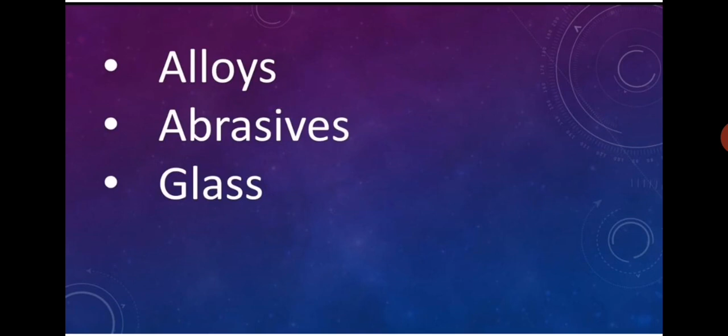This industrial chemistry 1 includes 3 topics: alloys, abrasives and glass. As you know, I already started this unit in the Zoom classes in the previous week. So today we are going to discuss alloys. So friends, in alloys we have to study their introduction, why alloys are used, the importance and uses of alloys, types of alloys, their properties and different applications of these alloys.

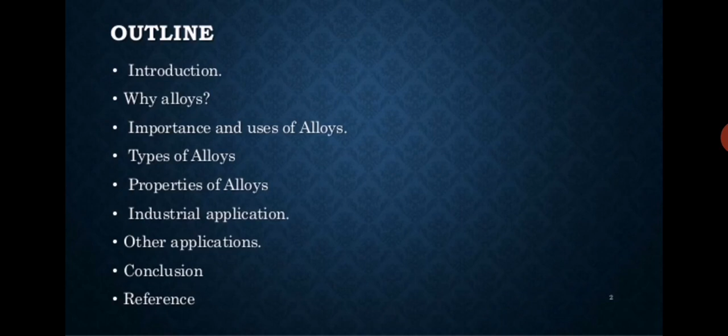Now we are going to the preparation of alloys. Why are we going to prepare these alloys? Alloys can be made by combining 2 or more metal elements while in a molten state or by bonding metal powders. This is the first bit. These alloys are made through physical processes, and these alloys will be determined by physical and chemical properties.

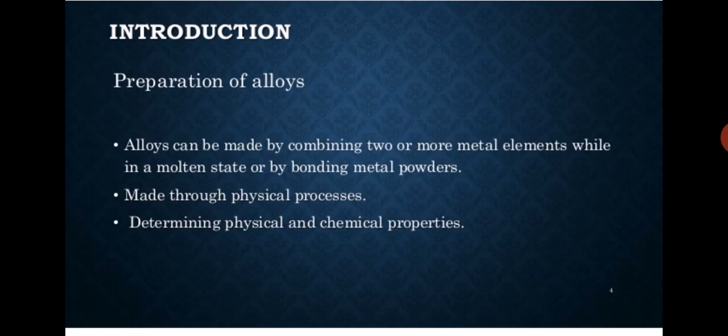Now, what is an alloy? Alloys are mixtures of a metal with another metal or non-metal in the same group that are prepared by mixing the metals in their molten state through physical processes. That means, as I told you in our Zoom class, an alloy is nothing but a homogeneous mixture composed of 2 or more elements.

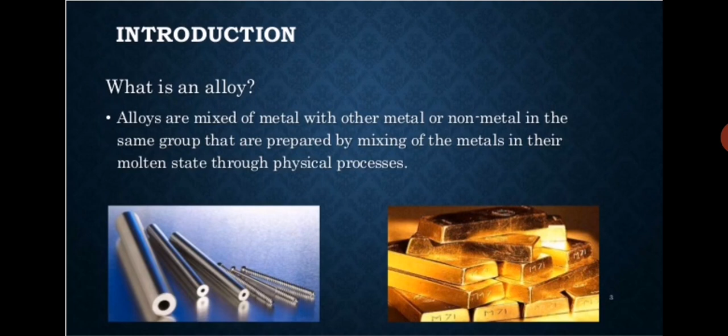Now, significance of alloys. To increase the hardness and strength of metal, to prevent corrosion or rusting of the metals, and to improve the appearance of the metal surface, meaning to modify the color of the metals. The first one, to increase the hardness and strength of a metal. For example, elements like manganese, chromium, vanadium, nickel, etc. have greater strength and hardness, and they are very tough metals.

By applying paint or color to the alloys, they become corrosionless, or by adding other metals. For example, in stainless steel, along with carbon and iron, we add a little amount of chromium. Here we add chromium only for the stainless, meaning corrosionless, property.

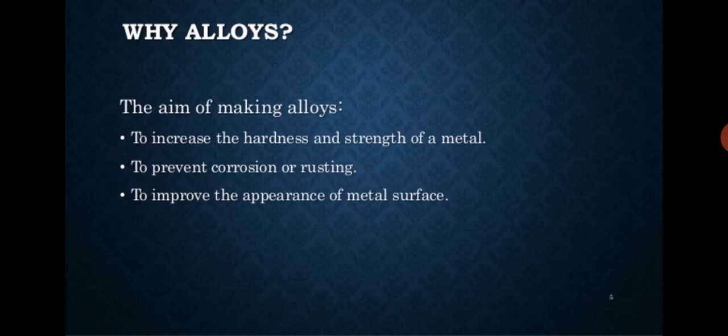Okay, now we are moving to the types of alloys. Alloys are mainly two types, ferrous and non-ferrous alloys. Ferrous alloys are those which contain iron as a major metal, while non-ferrous alloys don't have any iron content. You see, we classify alloys into two types, ferrous and non-ferrous. Ferrous means iron based, where the major component is iron, and non-ferrous means there will be no iron content.

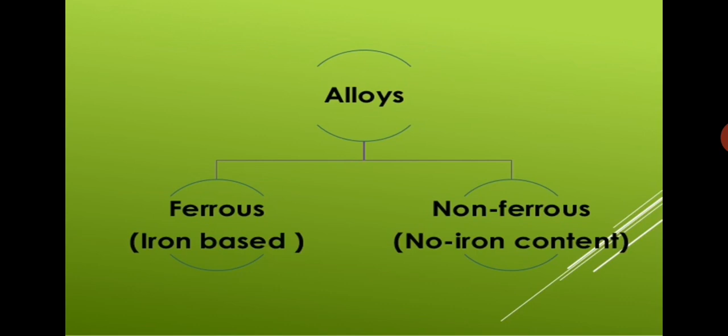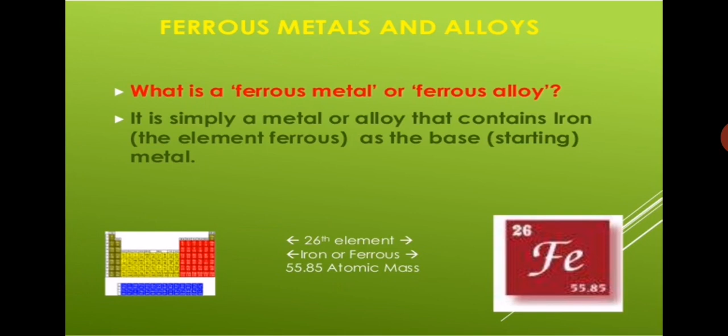Here are some examples of ferrous metals. Ferrous alloys are simply a metal or alloy that contains iron as the base or starting material. Ferrous alloys can be broadly classified into mainly two types, steels and cast iron. Steel has carbon less than 2.1%, and in cast iron the percentage of carbon is greater, from 2.1 to 6.67.

Steels have carbon in the combined form, for example, austenite, cementite. Cast irons have carbon in the free form as graphite. These ferrous alloys are not only iron and carbon alloys; a few other alloying elements are also added for special properties.

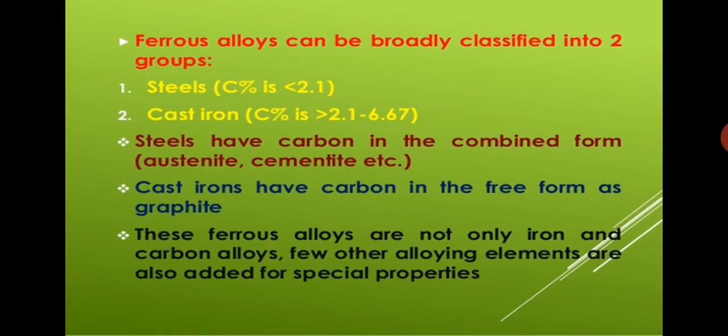So in the alloys, the first one is carbon steels. Carbon steel is further divided into low carbon steel, also called mild steel, medium carbon steel and high carbon steel. In mild steel, the carbon content is 0.05% to 0.3%. This is also known as mild steel. It is a low cost material that is easy to shape, while not as hard as higher carbon steels. Its surface hardness can be increased by carburizing.

What are the uses of these carbon steels? We use carbon steel materials in bullets, nuts and bolts, chains, hinges, knives and armor, etc. The second one, medium carbon steel. The carbon content in medium carbon steel is 0.3 to 0.7%. Medium carbon steel is ductile, strong, with good wear properties.

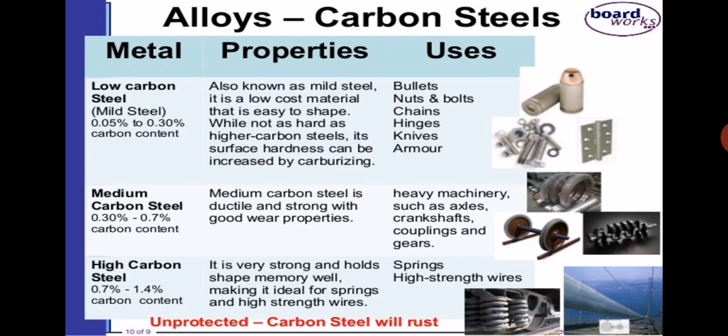The next one, stainless steel. Stainless steel is made up of iron, nickel and chromium. Here we use chromium for its corrosion resistant property. Uses: kitchen worktops, cutlery, pans, chains, wire, Swiss army knives, etc.

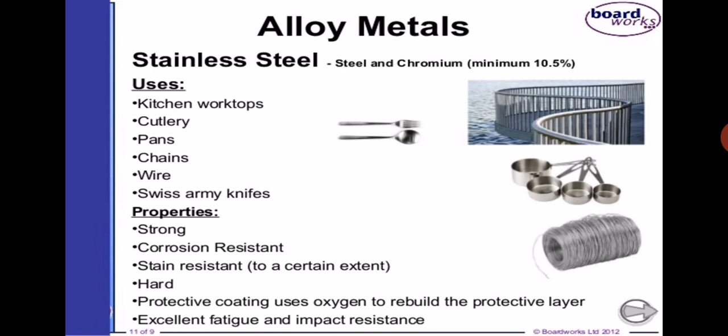The properties of stainless steel: strong, corrosion resistant, stain resistant, hard, a protective coating using oxygen to rebuild the protective layer, excellent fatigue and impact resistance. Moving on in the ferrous alloys, the next one is high speed steel. High speed steel contains 18% tungsten, 4% chromium, 1% vanadium, and carbon only 0.5 to 0.8%.

The uses: high speed steel is a subset of tool steels. They are commonly used in tool bits and cutting tools. It is often used in power saw blades and drill bits, for example milling tools, drill bits, turning tools and circular saw blades. These are mostly used in electrical and wood cutters, etc.

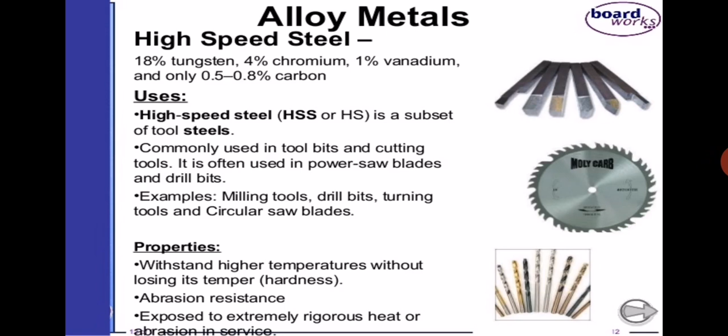Properties: withstands higher temperatures without losing its hardness, and abrasion resistance when exposed to extremely rigorous heat or abrasion in service. The next one, low carbon steel. Low carbon steel contains less than about 0.25% carbon. It is unresponsive to heat treatment because of the very small amount of martensite. It can be strengthened by cold work.

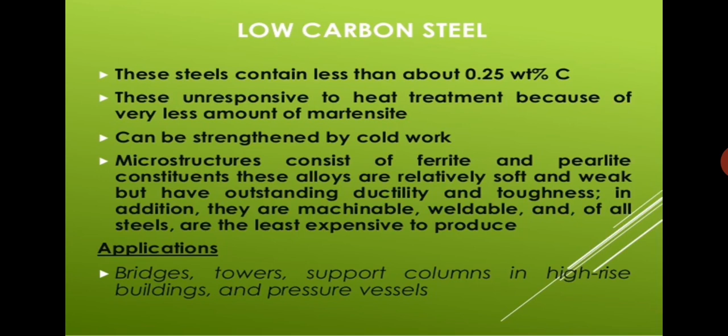Low carbon steel microstructures consist of ferrite and pearlite constituents. These alloys are relatively soft and weak. In addition, they are machinable, weldable and of all steels the least expensive to produce. Applications of low carbon steel: bridges, towers, support columns in high-rise buildings and pressure vessels. In all these construction materials we use low carbon steel.

High carbon steel. High carbon steels contain 0.6 to 2.1% carbon. These are mainly tool steels. They have very good hardness and wear resistance. Tool and die steels are high carbon alloys usually containing chromium, vanadium, tungsten and molybdenum. These alloying metals combine with carbon to form very hard and wear resistant carbide compounds.

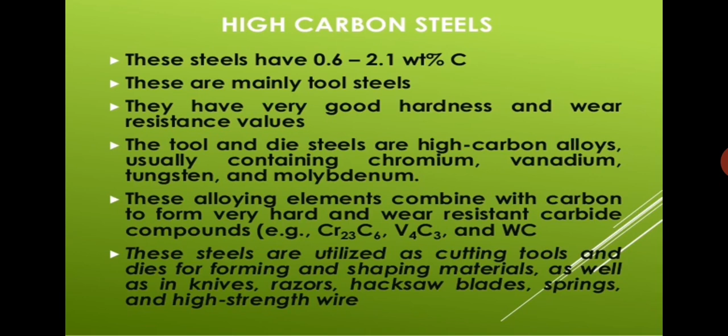These steels are utilized as cutting tools and dies for forming and shaping materials, as in knives, razors, hacksaw blades, springs and high strength wires. So now moving to non-ferrous alloys. Non-ferrous alloys means they do not contain iron as their material; they do not contain any iron content.

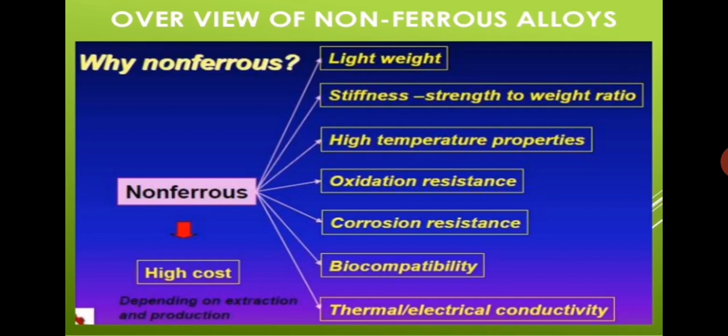Why do we use non-ferrous alloys? Because of light weight, stiffness, strength to weight ratio, high temperature properties, oxidation resistance, corrosion resistance, biocompatibility, and very good thermal and electrical conductivity. Because of all these reasons we use non-ferrous alloys. Some examples: copper alloys such as brass, bronze, copper beryllium; titanium alloys, aluminium alloys, magnesium alloys, refractory metals.

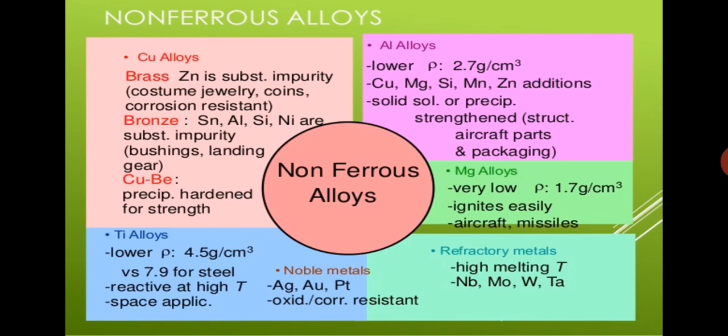In the copper alloys, in brass zinc is the substitutional impurity, and these are used in costume jewelry, coins, and for corrosion resistance. In bronze, tin, aluminium, silicon and nickel are the substitutional impurities. These are used in bushings and landing gear. There are many more types of non-ferrous alloys, and we will discuss all of that in the next class.